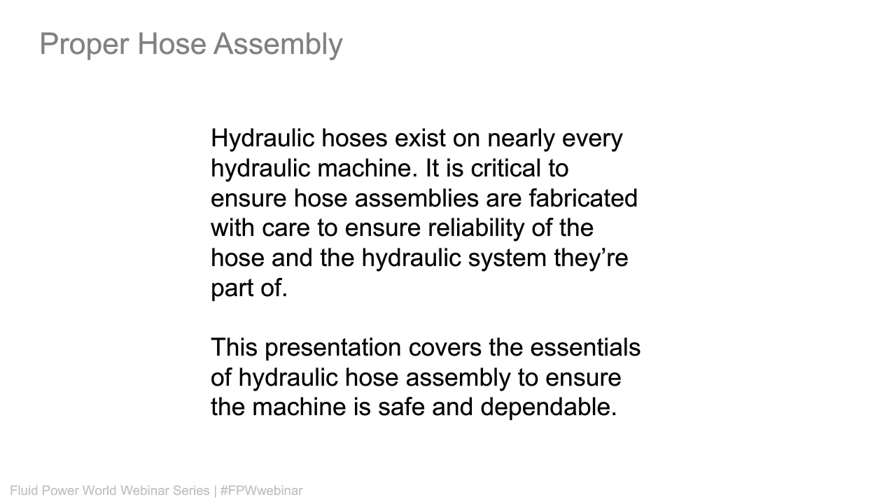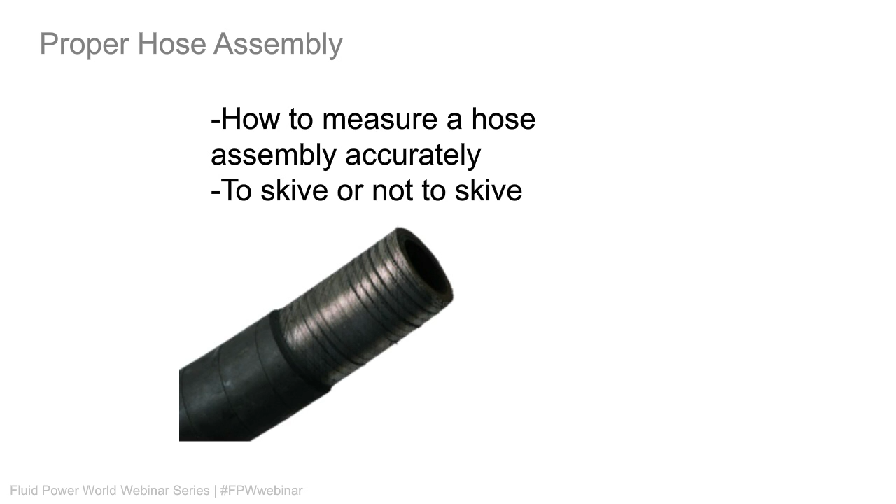So what we're going to cover today: how to measure a hose assembly accurately, to skive or not to skive - that is the question, what hose to choose for the application, and why hose flexibility matters.

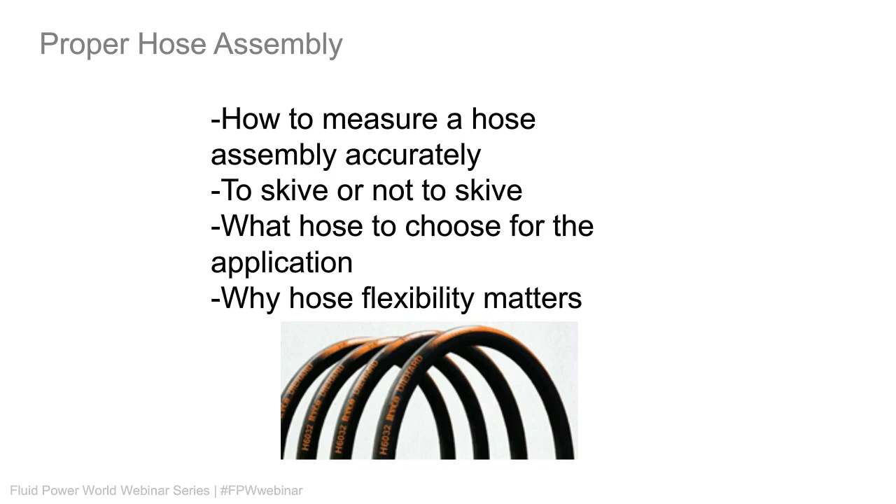So you have to consider an important first step: identify what you need. Sounds simple, you want a hose, but there's more to it than that. Is it a new hose assembly, or is it a replacement hose assembly? As you can see, this one's pretty old, needs to be replaced.

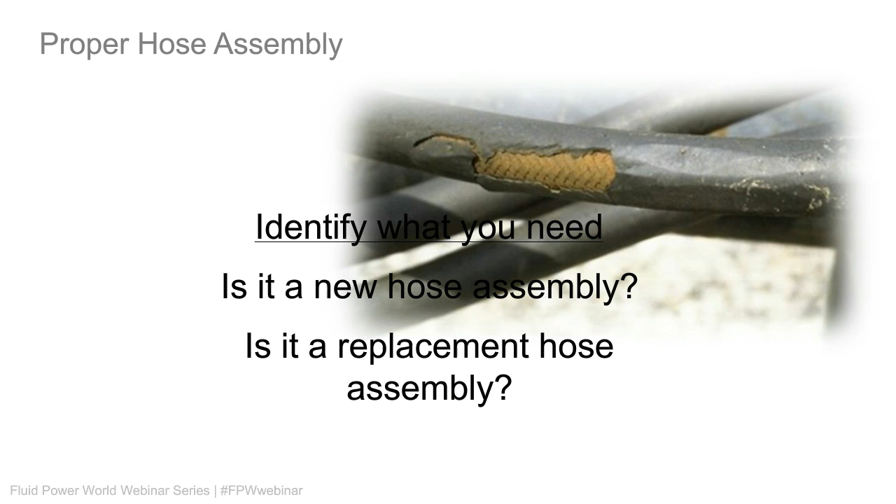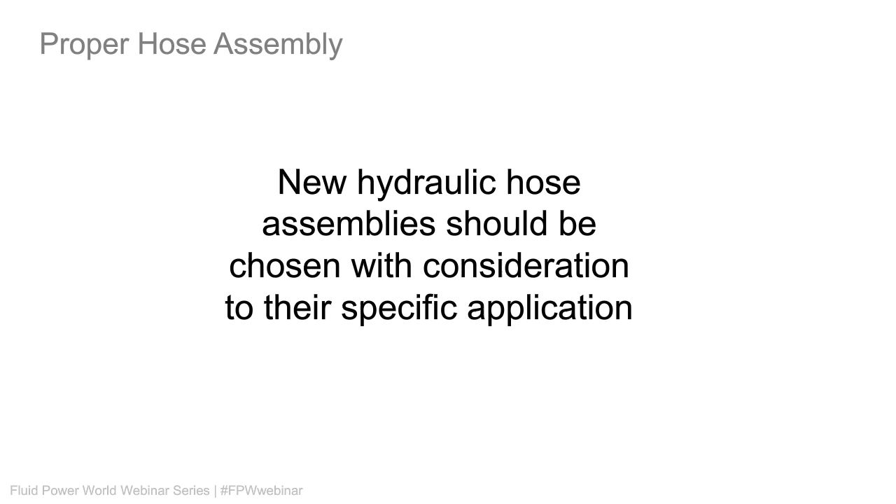New hydraulic hose assemblies should be chosen with consideration to their specific application. If you're creating a new hose from scratch, you need to lay it all out to decide what kind of hose you need. You may have seen this trusty acronym stamped - every letter stands for something: size, temperature, application, material, pressure, ends, and delivery - delivery being how much you need and when. I'm going to go through this acronym, the STAMPED, and discuss every stage of hose selection up towards assembly.

So first consideration is size.

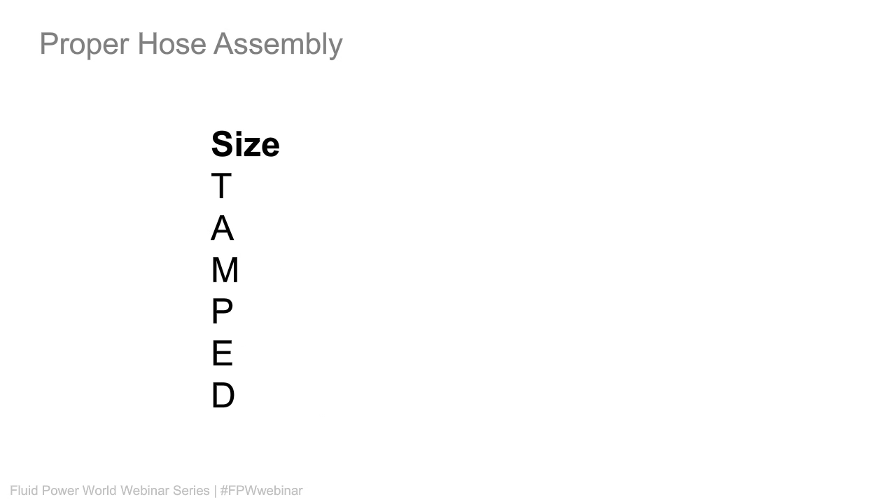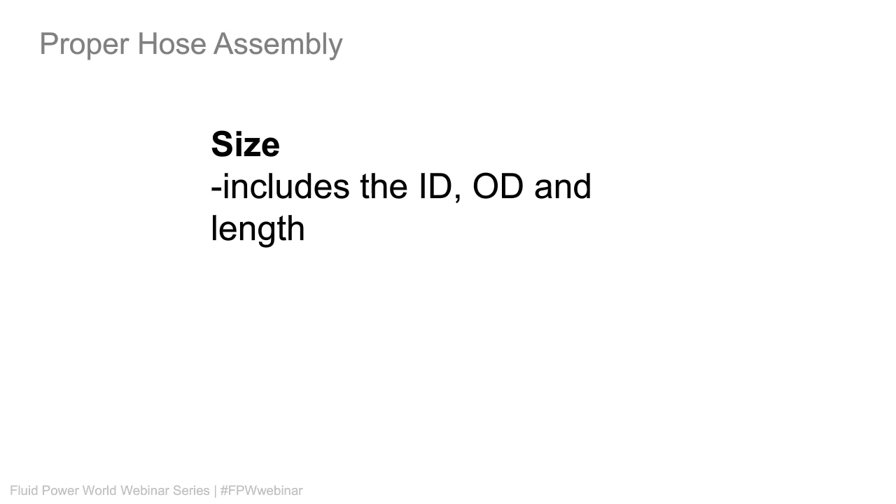So the size includes the ID, the OD, and the length. So ID of the hose is critical, because the hose must be sized appropriately to handle the flow with a little pressure drop.

So if you have a system with 12 gallons a minute of flow, something around the half-inch hose is probably pretty good. If you're at 30, 40 gallons a minute, half-inch is no longer acceptable. There's too much pressure drop.

I've seen applications of 500 feet of hose on an underwater robot that was run by hydraulics, and it had 1.5 gallons a minute of flow, and even using quarter-inch hose caused 1,500 psi of pressure drop. So that just shows you how critical hose diameter can be.

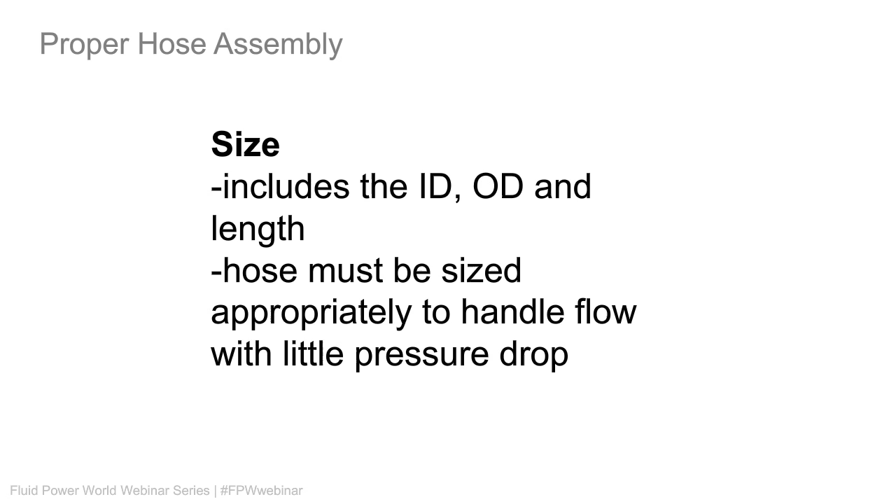So measuring the length. A lot of people will take an old hose assembly they pull off a machine, or just a new assembly they've had somewhere and they're trying to copy it, and they'll measure the entire tip-to-tip length. That's not really the right way to do it. If you try to copy that, you'll end up having hose lengths that may not fit the machine they came off of.

Using this example, the overall hose assembly length is actually where the fittings join. On the left side, you have this JIC female. It mates up to where the male side of the JIC is inside the fitting itself, not at the tip of the threads. On the right side, on that 45-degree elbow, you can see that the hose links onto the center point of that fitting, not to the very tip. So it's critical to measure a hose so that it's at its mating point rather than at its entire tip-to-tip length.

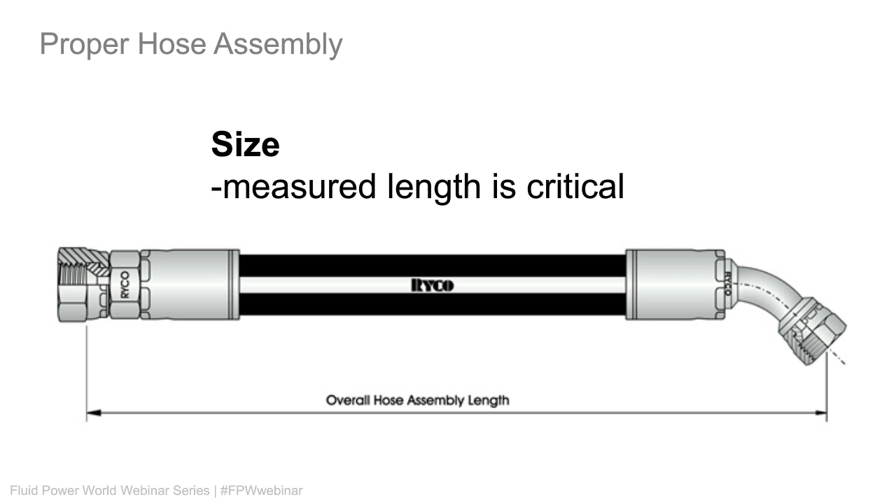So one thing to factor when you're going to size up your hose: it's good to get the whole end-to-end length of the measuring of the hose, just like the example we had. But that's not what you want to cut your hose to. If you cut your hose to that entire measured length, your hose is going to be too long. I'd rather have a hose that is too long than too short, but it can cause bunching and vibration, and it just might not fit and look pleasant in the end.

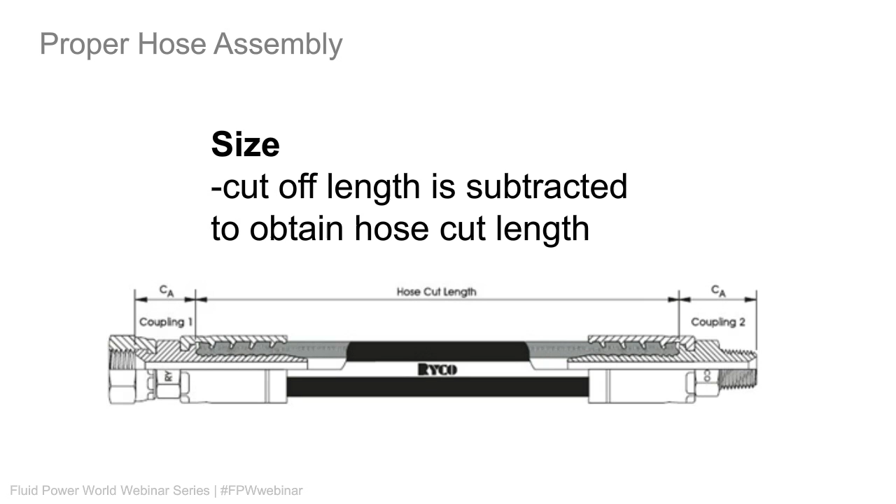So one thing you have to factor is how far the hose goes into the fittings. What we have here on a hose is what we call the cutoff factor. Each end of the fittings has a factor for how far the hose is pushed into the fitting itself, so you have to subtract that from the total hose length.

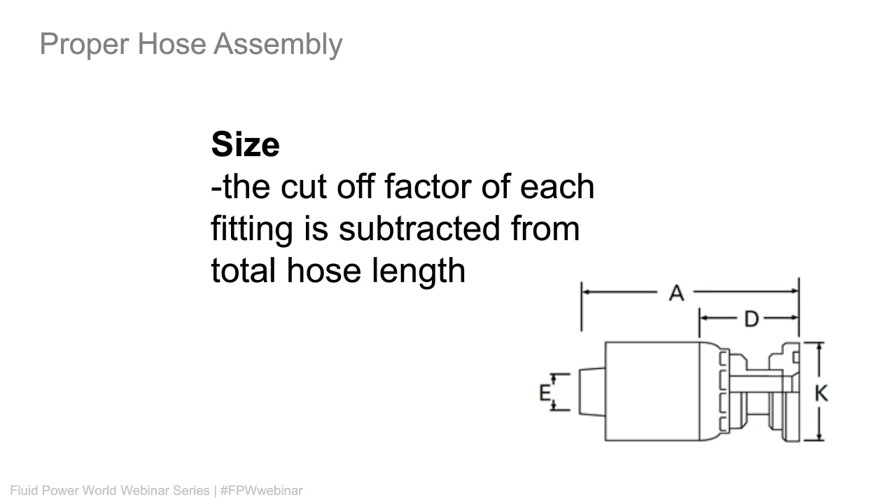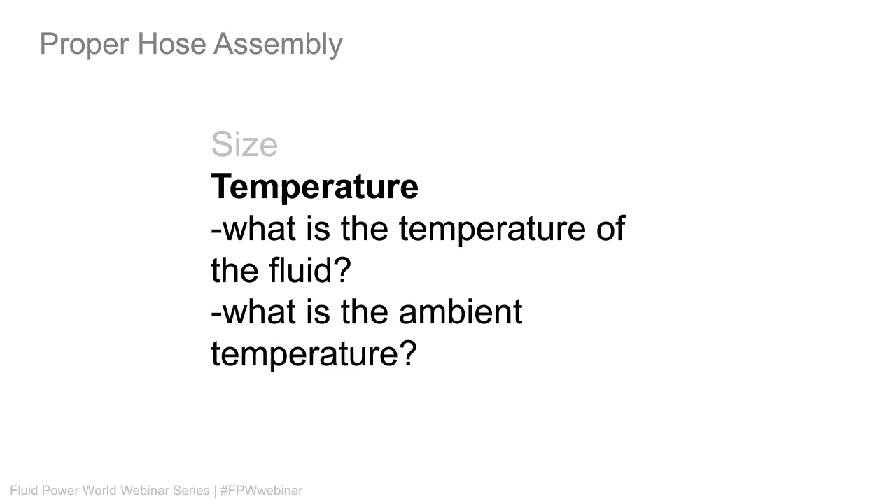Now why this is an important consideration for ambient temperatures: no hydraulic oil likes to be up to 212. At that point, you're cooking it, you're boiling any dissolved water that's saturated within the fluid. You're oxidizing it very quickly. The fluid would varnish very quickly. So it's just a terrible condition to have hydraulic fluid that is that hot.

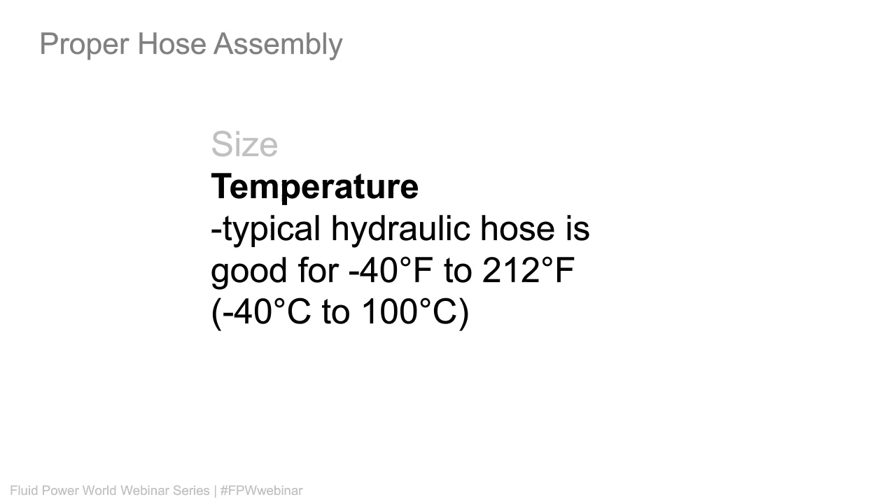However, you need to be able to handle ambient temperatures. So in machinery, mobile machinery specifically, you could have hoses running right past an engine or near exhaust components underneath the chassis of a truck. Examples in a steel mill as well.

So you might have high temperature hose that is good for 300 plus Fahrenheit. I should specify that's also at ambient temperatures. Even if you have high water-based fluids that are fire resistant, you still have to have hose that is going to resist melting or fracturing or softening and having the whole hose ends come apart. But I should mention that when it comes to handling those kinds of temperatures, a high temperature hose up to 300 is for ambient temperatures, not for the fluid itself.

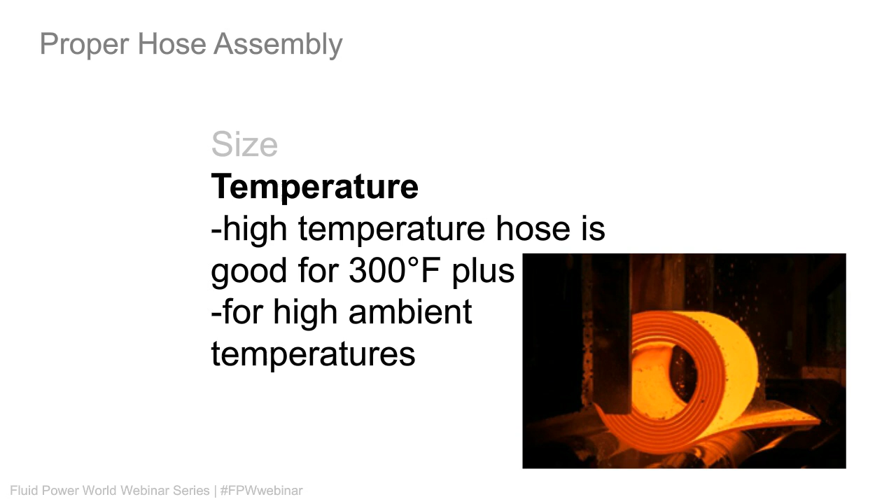And conversely, you can have a low temperature hose. This can be good to minus 58 Fahrenheit or lower, and this is for cold ambient conditions. So here we have an excavator running in some Arctic temperatures. The machines are so reliable these days, they can run all year round. You used to have construction season from May to September, and now construction season lasts all year long. That's because of the nature of hydraulic machinery and how much more reliable they are.

What happens is when you have a cold hose, it becomes more brittle, so it'll crack and fracture, but it could also just have a poor bend radius or just poor reliability. So cold temperature hose could be appropriate.

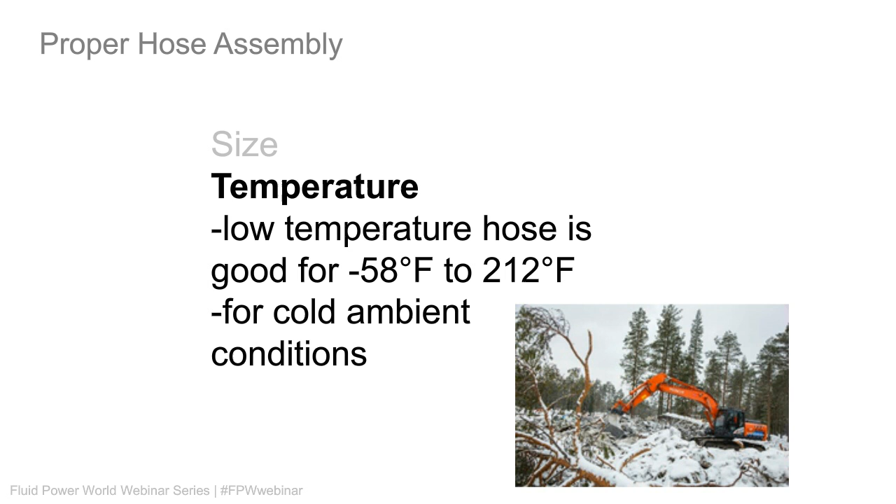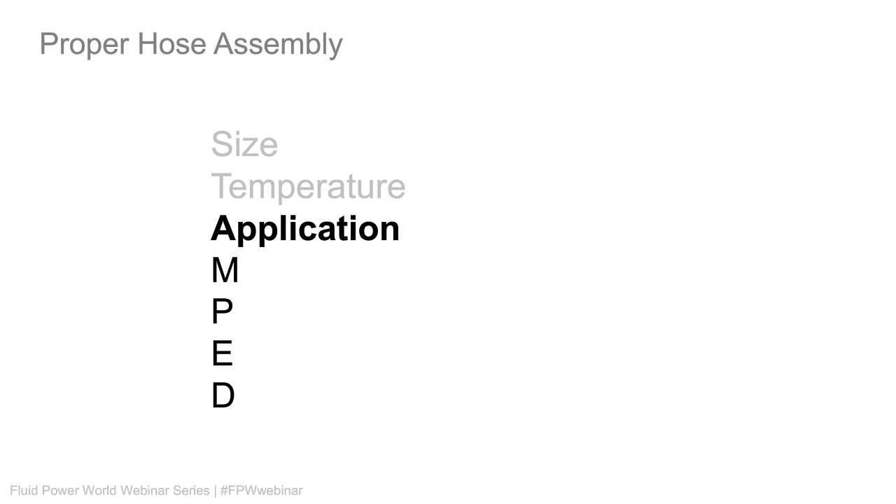So then discussing further, we have your application. This is specific to what this is, regardless of all the other factors. Where is the hose being used, and then what is the required bend radius? So these are application details.

When discussing a bend radius, here we have this picture. I'm actually showing bend diameter, but bend radius would be half that dimension. So this is an example where you have two components that need to be closely mounted to each other.

The ideal situation is these would be hard plumbed with tubing, but there are some cases where you have to use hose for vibration resistance, or perhaps the two components move away from each other, so they could be on a boom, or a cable track, or something like that on an injection molding machine platen. So tight bend radius hose can be used, which is often twice the flexibility of standard hydraulic hoses.

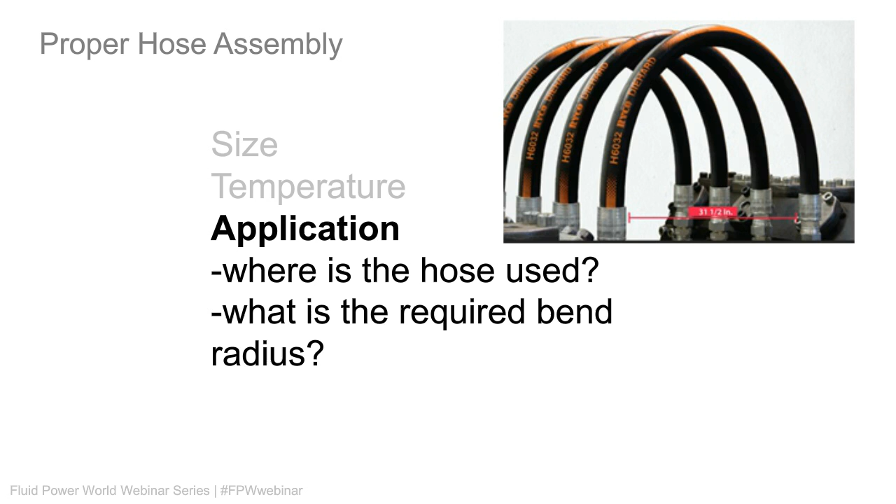Okay, so more details about the application. What are the external conditions? Not just about cold weather, but is there risk of abrasion or corrosion or electrical conductivity?

Abrasion-resistant hoses exist, so the outer cover is reinforced so that it can rub against things without wearing away. So it has a tougher cover.

You might have corrosion-resistant braiding. So, for example, a lot of hose will have braided or spiral steel. You may have a synthetic fiber, such as Kevlar, as that braid, which obviously will not rust, because any water that gets onto a hose, the cover is permeable. Water can seep through, and if you go back to that image I showed earlier with the used hose, that braiding can rust, and as it rusts, it loses strength, and you can have hose breaks and bursts.

So having corrosion-resistant braiding material could be important. If you work around power lines, like you see in this picture, you want to have electrical conductivity avoided at all costs. You can imagine the hydraulic hose will touch one of these power lines and then conduct electricity right through the machine into the ground or to the operators. So they use a non-conductive hose, of a synthetic material, that can still handle pressure without actually conducting electricity.

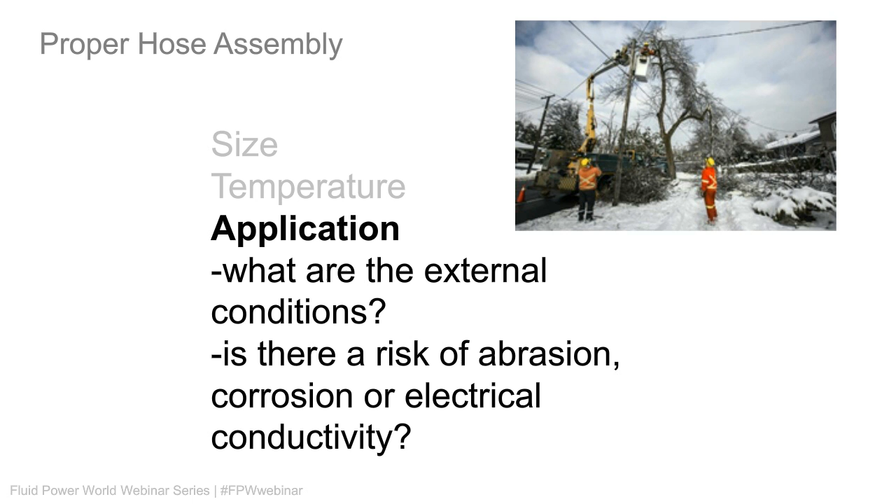So the next step is selecting your material. What type of fluid is being used? This is critical to hose selection.

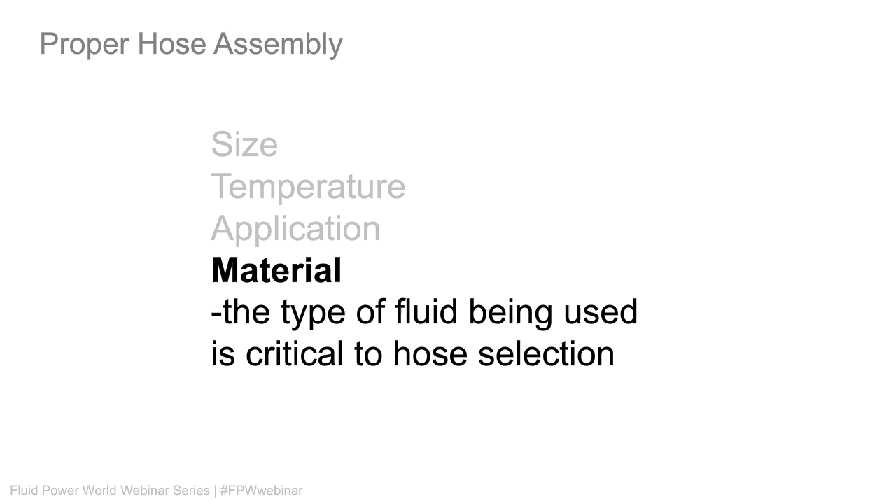The standard mineral-based hydraulic fluid is compatible with most hose types. Most hose types might have a nitrile buna tube on the inside, the inner portion of the hose. And most standard hydraulic oil, the AW68 or what have you, the industrial oils, and most of the machine oils we use, transmission oils, ATF, that stuff's usually good with most of your standard hydraulic hose constructions.

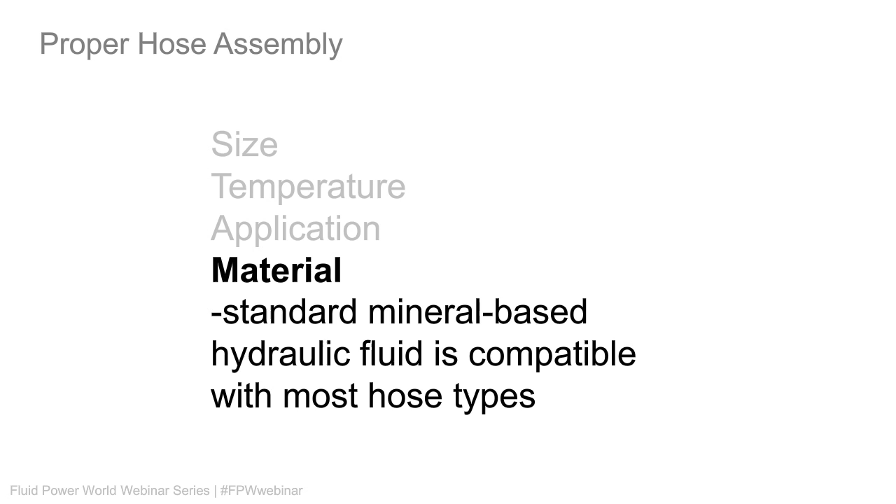But you could have some exotic fluids like phosphate ester, which require synthetic hoses made of EPDM. It's a little bit of a more nasty or corrosive fluid that requires a more—I wouldn't say stronger—but something that is better for compatibility, something that will not break down or crack or become brittle because of the nature of the fluid.

And there are cases too where you have high water-based fluids that may affect your selection of hydraulic hose as well. High water-based fluids might have an emulsion or some other glycol or something like that, but still the content of water can make them react with the steel braiding and have it rust over time as well.

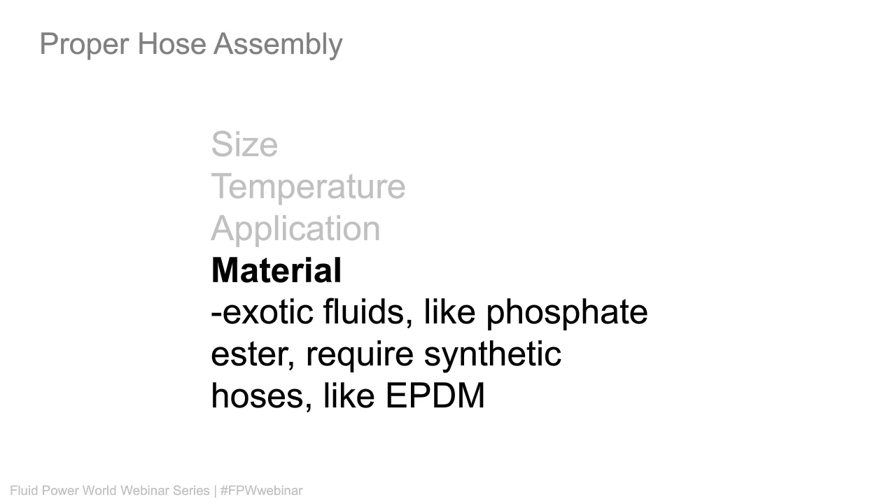And then pressure. Of course, pressure is what hydraulics is all about. So pressure capacity is the defining criteria for a hydraulic hose. It's why it exists, and it's why hydraulics is the magical principle that it is. And the pressure capacity that you need dictates hose construction.

So there are a lot of ways to skin a cat, and there's also a lot of ways to make hydraulic hose. So the pressure that you need, combined with all the other factors I've spoken about so far, will affect the construction of that hose.

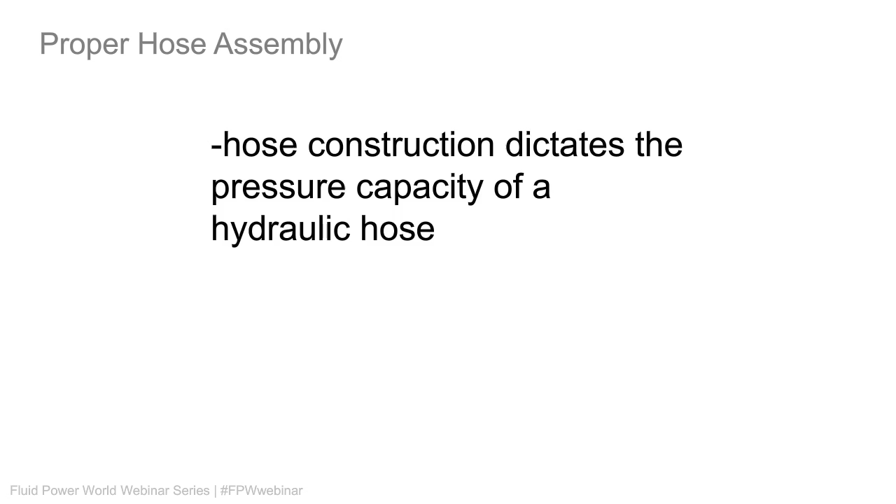Hose construction dictates the pressure capacity of the hose. Depending on how it's constructed will depend on how you can rate your hose for pressure. So the three layers of a standard hydraulic hose, this is what we call a one-wire hose. You have the cover, the reinforcement, and the tube. The cover is on the outside.

The reinforcement, in this case, is braided wire. Now when we say one-wire hose, there's not literally one wire that's been wound around a million times, it just means one layer of wire. So in this case you have one wire, one layer of braided hose. By braided, it means this crisscross fashion of strings of steel braiding. It's pretty tough but also pretty flexible. So the one-wire hose is typically the lighter duty of the selections, but also very flexible. The type of cover, reinforcement, and tube are also factors in your abrasion resistance, your conductivity, and the tube can affect the chemical compatibility of your hose.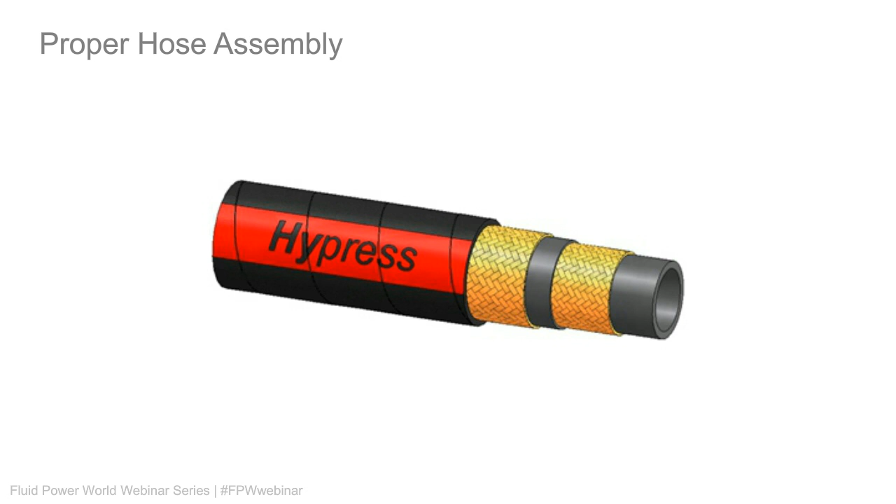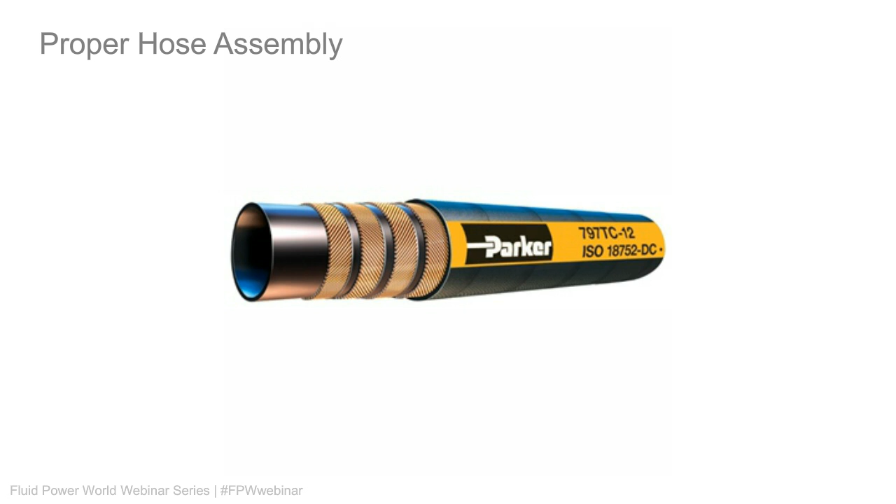Stepping up a notch, here we have a 4-wire design, and you can see that the braiding is not braiding at all, but spiral. Every direction of wire is crisscrossed so that the spirals go in an opposite helical direction. This adds even more strength. Just having the number of wire layers adds strength, but the downside of this type of hosing is you start to have reduced flexibility.

So as these hoses become bigger, as the pressure capacity increases, so does the stiffness. There's an inverse proportionality between the size of the hose and the pressure capacity. Good quality hose can generally handle pressure from any size, from 1/4 inch up to 2 inch or larger. But some of the standard braided hoses, the smaller it is, the higher the pressure it has. For example, a 1-wire 1/4 inch hose could probably handle 5,000 psi, and that's just because of the nature of pressure and the amount of force vectors it has to push on the inside of that hose.

So without getting into physics or math, the smaller it is, the more inherently strong it is, so it can handle pressure all by itself. The larger you go, the more surface area there is for pressure to push upon, and more opportunity for the forces to want to make it burst outward. It's the same reason that a large hydraulic cylinder makes more force than a small hydraulic cylinder.

So kicking it up a notch once again, here we have 6-wire spiral hose. You can imagine that the pressure capacity increased even further. This one actually has a couple layers of cover on it. It could be for chemical compatibility, heat, or abrasion resistance. But this is some pretty heavy-duty hose right here.

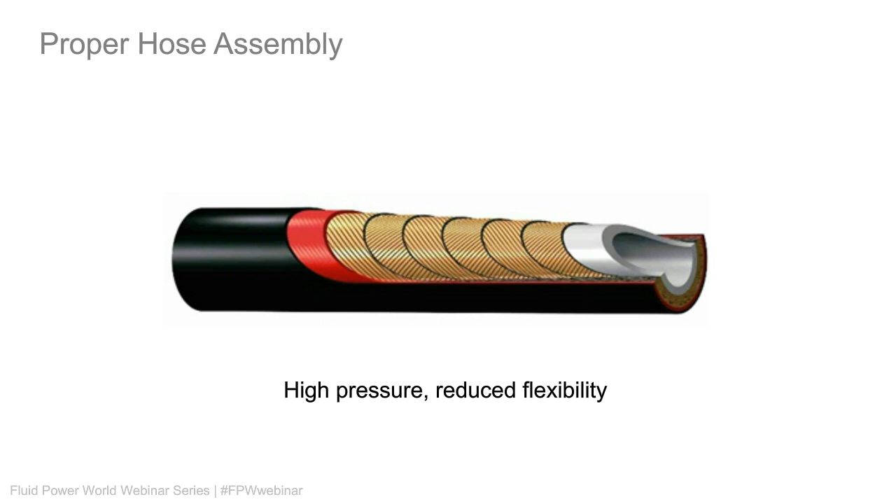So if you flip through the catalogs of any given hose supplier, in this case we're looking at some Ryco H6000, their Die-Hard series hose, it's going to give you all of the parameters and specifications of that particular hose. It's going to start with your hose number, the dash size. Here's a little trick: if you've never heard the dash size before, just look at this chart. You can see the dash size 06 equals 3/8, and 08 equals 1/2.

The 12 equals 3/4. There's a pattern there, and somebody thought it'd be clever to make that dash number over 16. So for example, dash 6 is 6/16, which is also 3/8. Really the dash size just expresses the fractional inch size, if you didn't already know that. So the dash size, which is also the nominal ID of the hose, is nominal because it's not always exactly that diameter, and then there's the nominal OD of the hose.

In this case, you also get your maximum working pressure. This is the pressure that a hose can work day in and day out. So this particular Die-Hard hose will work at 6,100 psi all day long till the cows come home, and every size they offer in this line will operate at that pressure. That's just because of the nature of its construction.

The burst pressure is what they offer as the maximum pressure before this hose will generally explode or have a rupture in it. The entire thing is not going to be catastrophic like an exploding propane tank, but the nature of hydraulics and the bulk modulus of oil means you'll have a tiny pinhole and a squirt, and something will give way and allow pressure to bleed out or drop quickly.

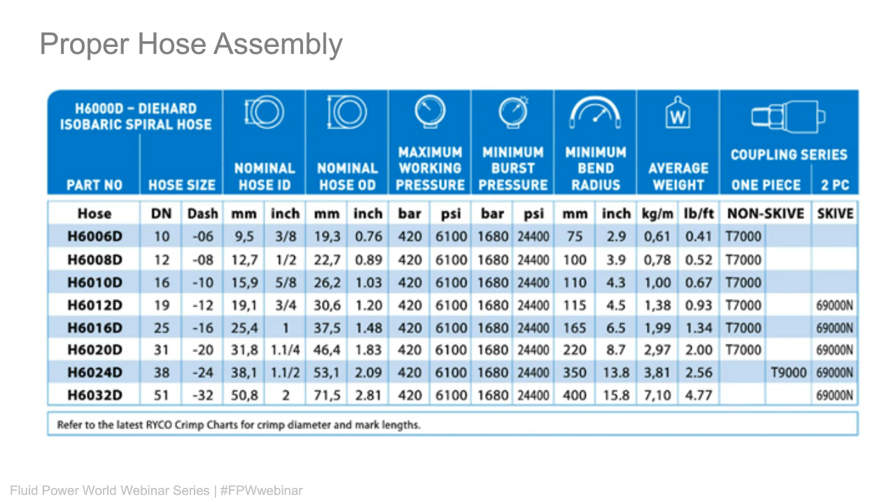So just as a quick comparison, this is the Ryco T1A, which I think has been discontinued, but regardless, you can see the different sizes, and you can see that they are different. If you look at the OD of the hoses, we'll compare one in a second.

Generally, because it's a low pressure hose, it's a smaller OD, so it's going to have reduced working pressure. Right across the board, you can see my point earlier where this 3/16 hose has a 3,600 psi rating. As you go larger in diameter, nothing changes about the construction, but just because of the nature of larger diameter and the forces applied to it, you have a reduced maximum working pressure. And once again, you have your minimum burst pressure, which is 4 times the working pressure.

There's an advantage to this, of course, when you have a lower pressure rated hose. This is why when choosing hoses, it's good to know exactly what pressure you want to run at. If you have a system running at 1,500 psi, do you really need to choose a 3,600 psi or 6,000 psi hose? Not really. You can save cost, save weight, and have improved bend radius by going to something lighter duty.

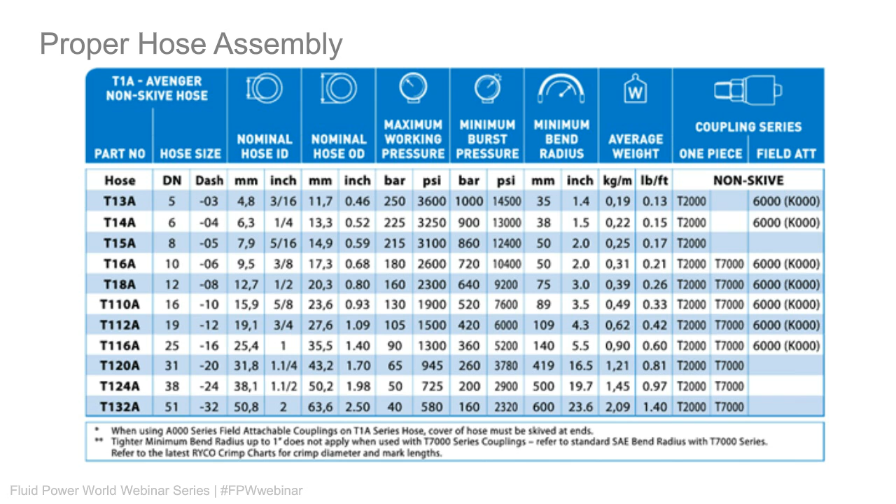So these ones will have a tighter bend radius, and they will also weigh quite a bit less per foot. So here I took the two and compared them in the Dash 16, which if you take 16 over 16, you get exactly 1 inch. Goes back to that whole dash sizing thing. And then we're going to compare every single factor along the way here.

So if you want to compare heavy duty and light duty, on this size you can see that the nominal hose OD is larger on the H6000D series. That's because it has anywhere from 4, 6, or 8 spiral wires, depending on the size of the hose. So the larger diameter hoses in that hose series will have 4, 6, or 8 - probably 6 or 8, depending on the size.

Anyway, the larger it goes, the more spiral-bound wires there will be, and you need a thicker hose in that case. In this case it's not very much, it's 80 thou, but it still accounts for a larger fitting or crimp that you have to put on it eventually. But look at the dramatic difference in maximum working pressure - just 1,300 psi working pressure for the 1-inch T1A compared to the H6000.

And then, of course, burst pressure being 4 times that. But here's where you have a trade-off. Looking at the bend radius, you can see that you can go on the T1A an inch tighter in the radius, which means 2 inches better on a whole circumference, or diameter, I mean. And then once again, in weight, this is where it really gets dramatic.

So if you have a mobile piece of machinery that is not an excavator running 4,000 psi plus, you can see where the weight savings come in. And this is per foot. I've seen some trailers and other pieces of equipment that literally have hoses running the length of a 50-foot trailer. And if you add up all that weight of hose, you can imagine twice the weight of a 4-wire hose, or this one could be 6-wire in this case. So that really adds up.

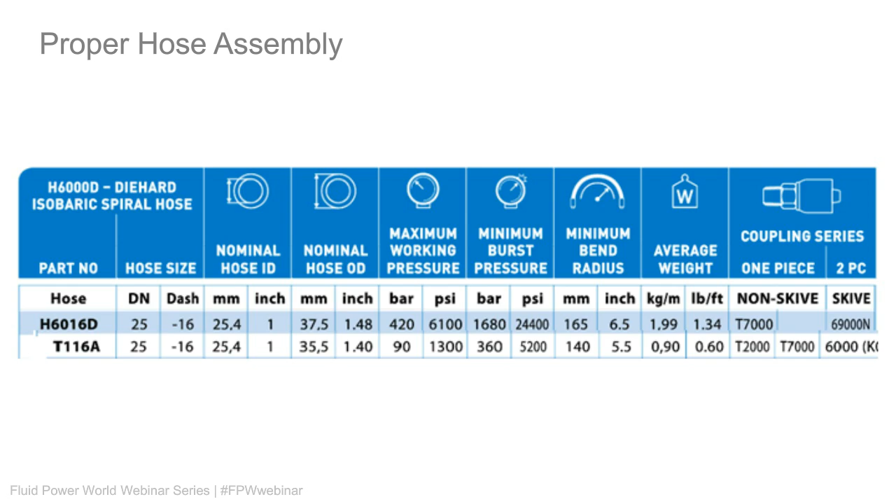So back to our stamped acronym. So now we're going to talk about the ends of a hose.

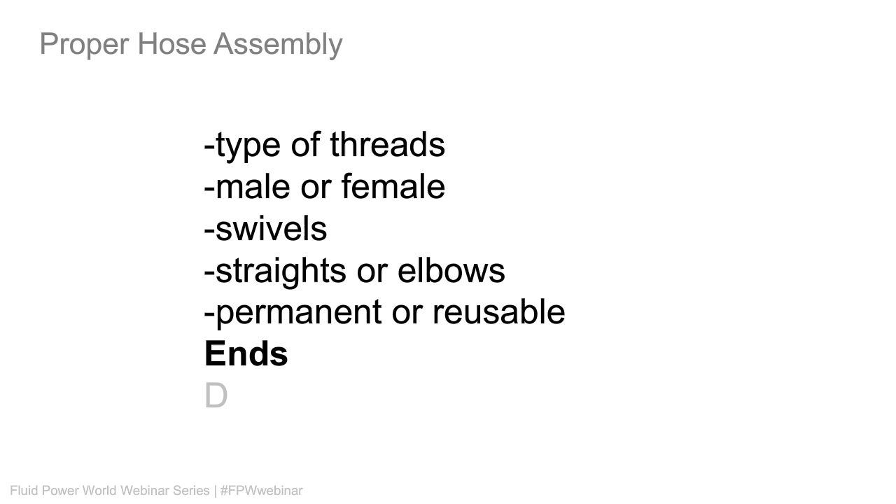So there's lots of ways you can do this. You can talk about the type of threads you want, which can be male or female. You can have swivels. You can have straights or elbows. And then any of those combinations can be permanent, which means crimped on, or they can be reusable, which is also what's called field fittings.

So the choices are endless. Every fitting that you have on a machine that needs to be plugged into, they make a hose fitting for it. We have some banjo fittings here. We have some metric, some JIC, some O-ring face seal. We have some NPT fuel fittings there that are swivel on. You name it, we got it.

So reusable fittings, which are also called field attachable, that's your first choice. I've spent a lot of time working with these in my day. Back in my car wash days, that was really all we used. We didn't have a crimp machine there. We had a vise and a wrench, and we could do these things in the field.

Crimped-on fittings are permanent, so also done a lot of this in my day. This requires specific machinery, which we'll talk about shortly.

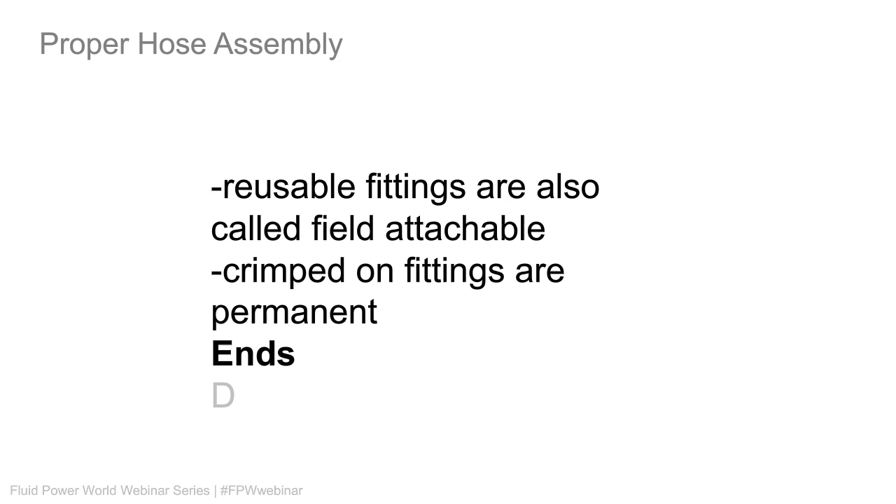So you may have seen these reusable hose ends. One end will go on the hose itself. The other end gets inserted into the hose. I'll explain a little more on this in a bit.

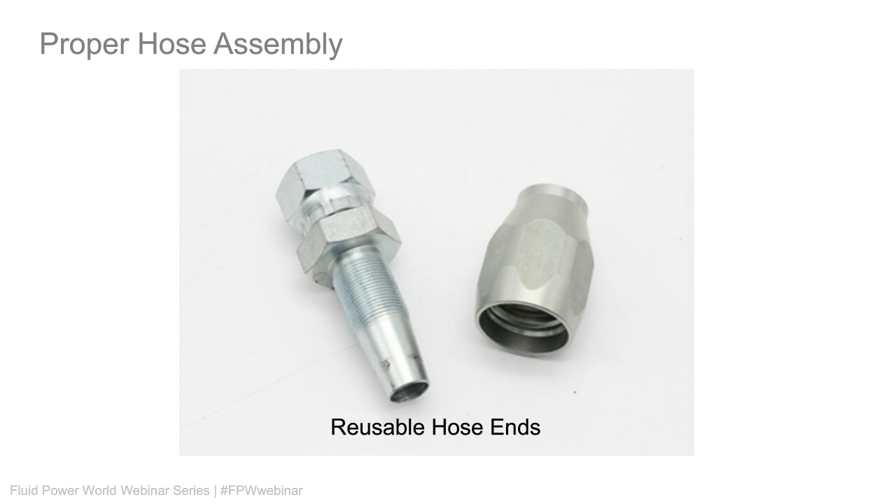And of course, your crimped hose ends. These will slide onto the hose, and your crimping machine will crimp it down permanently onto the hose. Once again, available in various sizes.

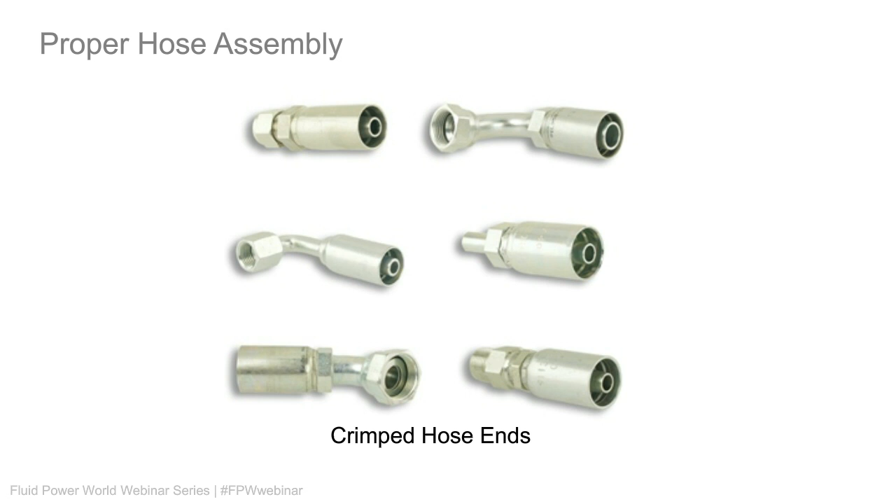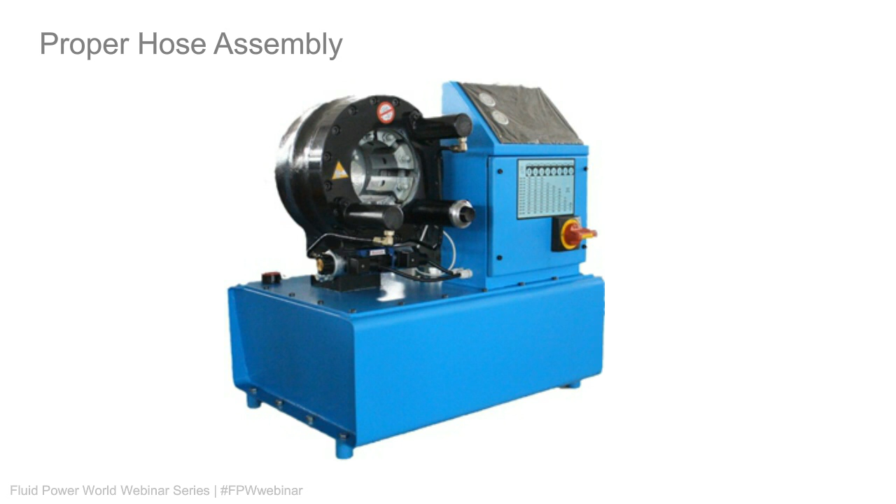But any average hose shop will have something more like this. This is a little bit fancy. It's got a hydraulic valve on here, and it's all hydraulically powered. Plugs into the wall, and it's electrical. This guy is accurate. It's got the full complement of dies in it, and you can see there's even a chart on the front of it to help you with your micrometer and all your settings to make it quick and easy.

If you're a very high volume shop, you have something like this, a CNC crimper. As you can see, this is absolutely ginormous and in the size of hose that you can crimp. I wouldn't want to be this guy because that hose probably weighs 100 pounds.

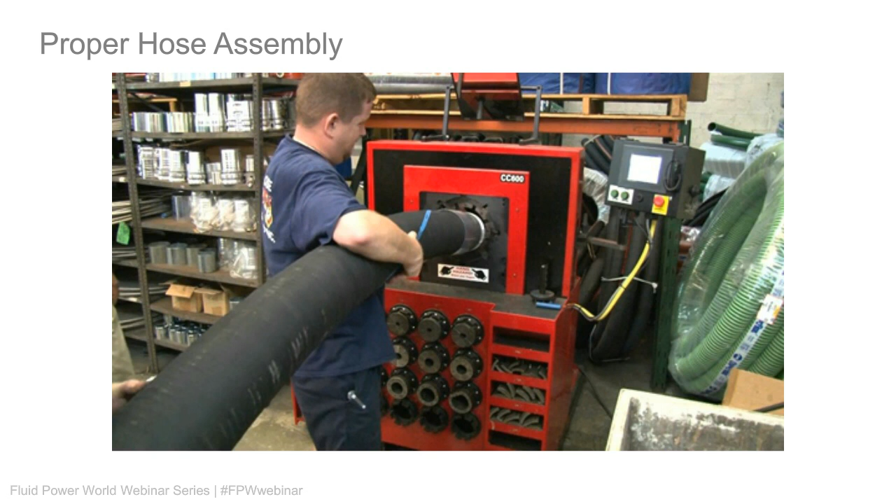So like I said, once you have your crimper—this is more in line with what most of you have used, will be using, or will see in our shop—you'll take this machine and then look into the data given to you by your hose and fitting manufacturer.

Here's what you might see in the front of a catalog. This is some more Ryco components, and it'll show you the types of hoses that are color-coded with the type of fittings you can use for that particular hose.

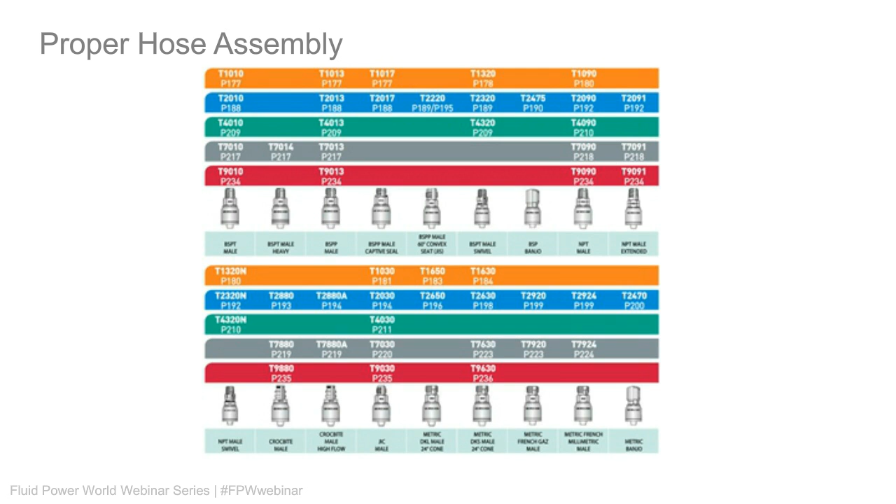Flip into the general catalogs and you'll see they give you that cutoff factor, the CA. Every fitting has a different cutoff factor, so when you're measuring your hose end to end, you subtract the cutoff factor, and those two cutoff factors subtracted from your whole hose length give you the length you cut your hose at.

You can see that it's listed here, for example. I think that's in metric, so 25 would be about an inch.

Once again, you can see those dash sizes used: 02 is 1/8, 04 is 1/4, 06 is 3/8, etc.

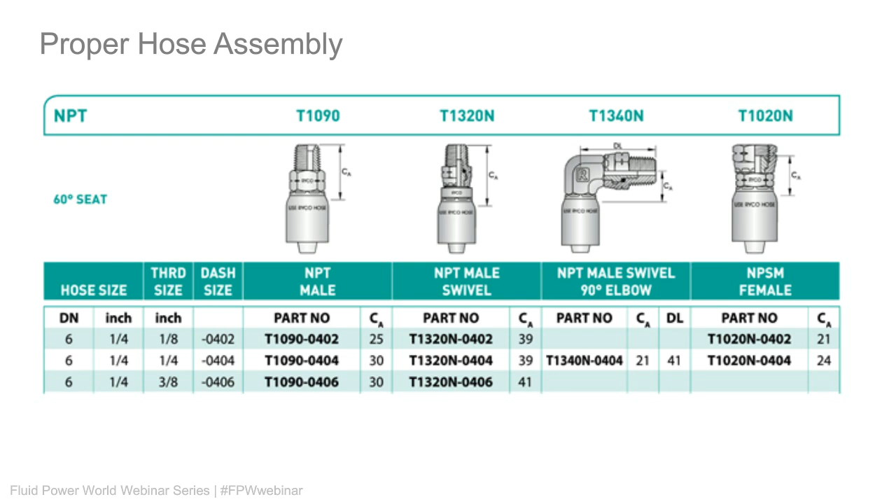So the idea is you set that up, set your dies, set that number, cut your hose, put the fitting on, crimp it.

And how do you get that? You get it with a set of calipers. You can get these at any tool store or any of your machine suppliers. That'll give you down to thousandths of an inch—in this case, this one gives half a thou.

So you use this to measure your hose to make sure it's right. There's a range you could get within a few thou either side—some ranges could be bigger. It doesn't have to be bang on every time, but it'll let you know if your machine is out of calibration, you inserted the wrong dies, or you set it to the wrong setting. This makes sure every hose is crimped right the first time and that the fittings are not going to pop off on you.

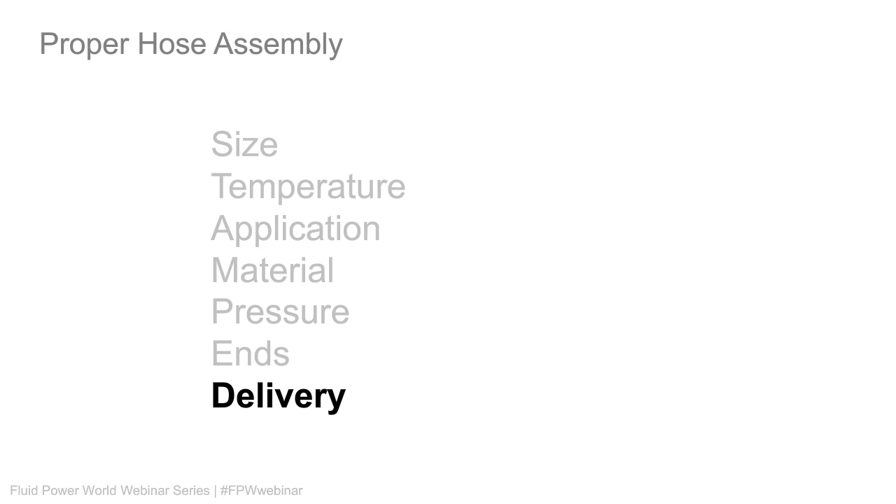Finally, you want to talk about delivery. How many hose assemblies do you need? How soon do you need them? Any special tagging or layline information?

If you're an OEM, you have the advantage that any of the large hose suppliers can provide hose assemblies with a custom layline, with series numbers, or entire hose kits. So if you have a particular machine, say a stone slinger, your entire hose kit could be coming from your hose supplier—every hose needed to plumb up that entire machine will be coded, tagged, and included in the kit so that when you're assembling that machine, it's all there for you. It all goes on the machine the first time, everything accurate and repeatable.

And if you're working with some of the very large hose manufacturers and you're a small guy who wants custom layline information that says 'Bob's Hydraulic Shop,' you can have that made too, as long as you're buying a certain amount or willing to pay for it.

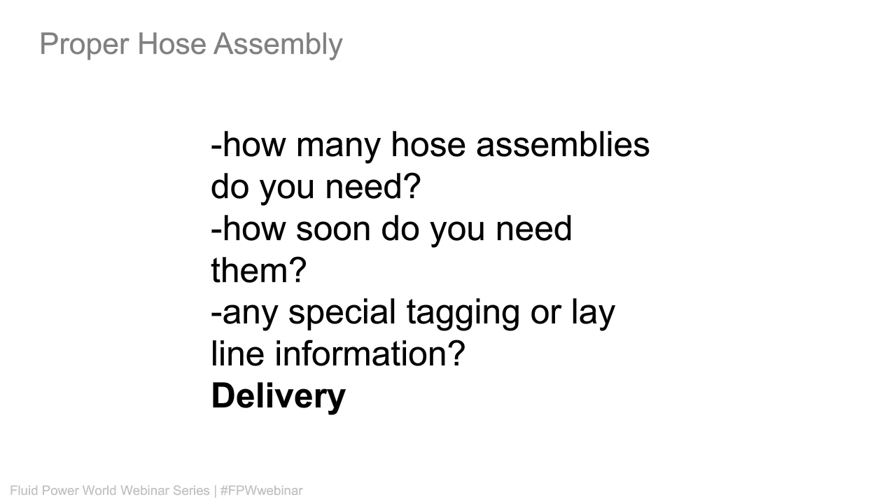So that was all the information for a new hose. But if you're going to work on an old hose—here you can see a burst hose—what do you do if you're replacing an old hose?

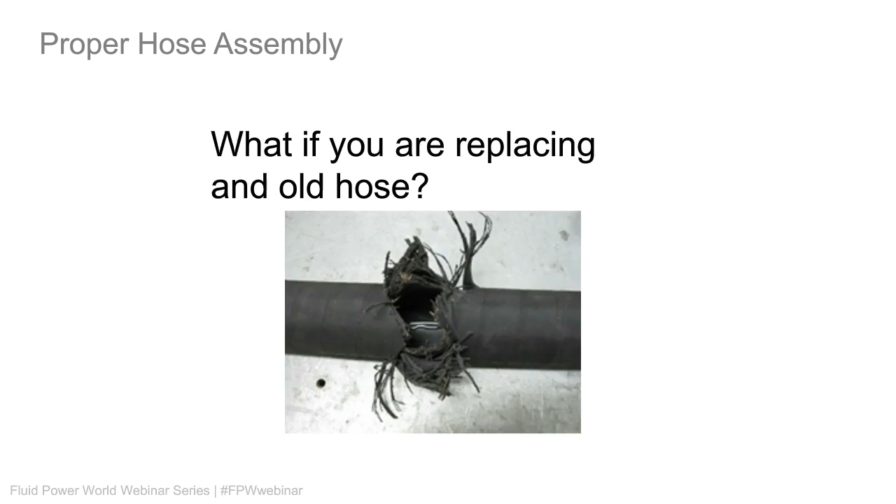Do not try to repair the old hose unless absolutely necessary. The best thing for you to do is follow the STAMPED protocol to ensure that the hose replacement is correct.

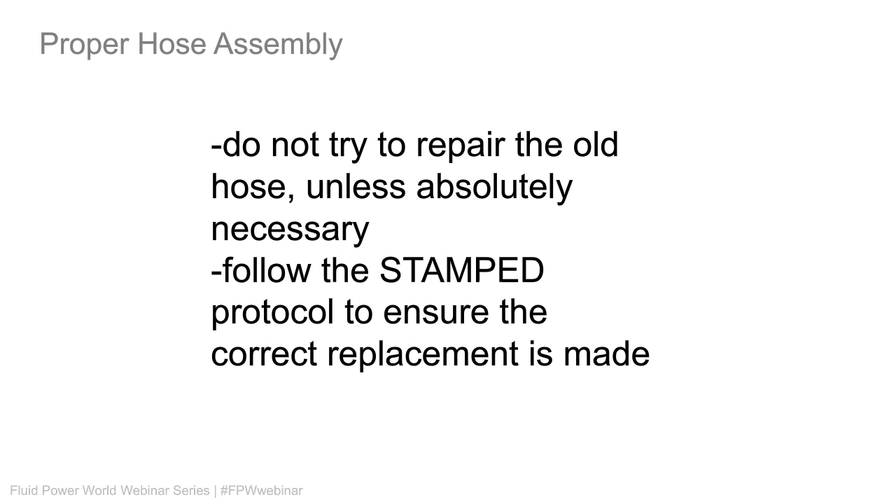However, there are times where it is okay to use an old hose. For any hose, new or old, what's important is you have to use a saw that is specific to cutting hose. They have an all-metal blade. Using an abrasive cutoff wheel can work if you're short, but it tends to not look so good as an end result. So unless you use a specific hose saw with a metal blade...

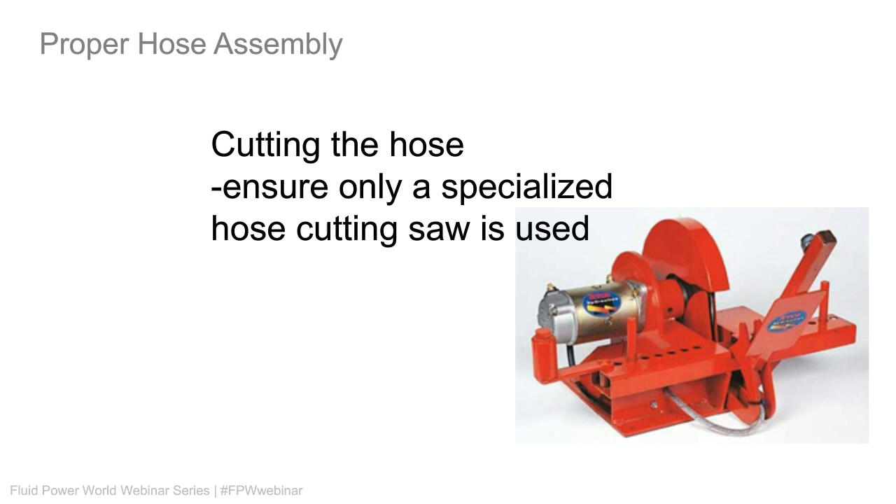One second here, the slide's not coming up. There we go. You can have frayed hoses. Obviously, that's not a hose, but I have seen hoses used with an abrasive wheel look like that in the end if you're using a non-specialized metal blade on that saw.

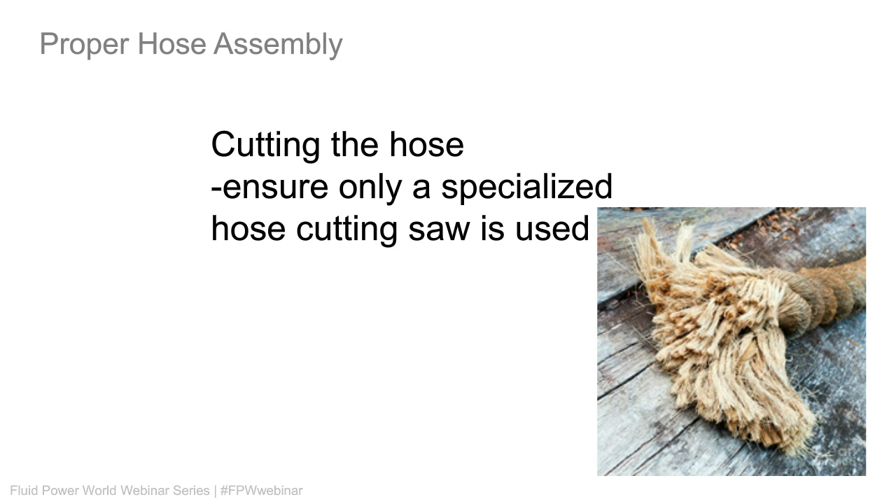Also ensure that you cut exactly 90 degrees. If you cut on an angle, 45 or anything, the hose will not be inserted into the fitting all the way, and you'll not get a proper crimp, and that hose crimp could pop off.

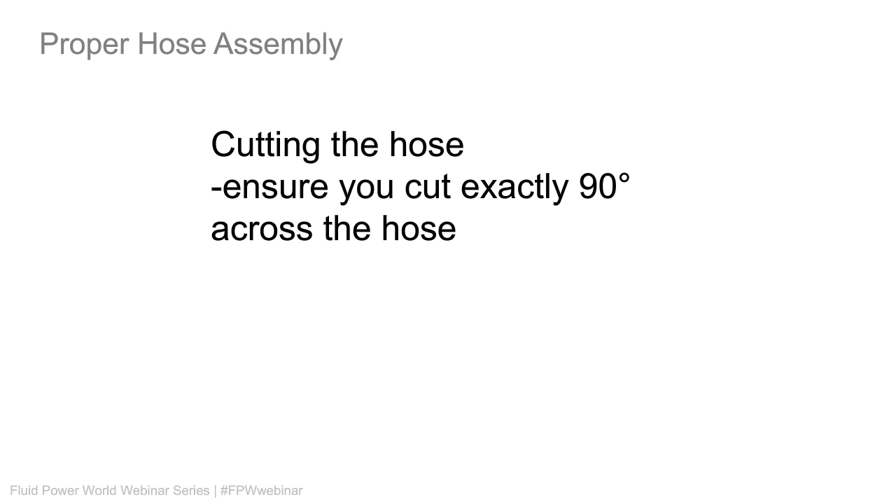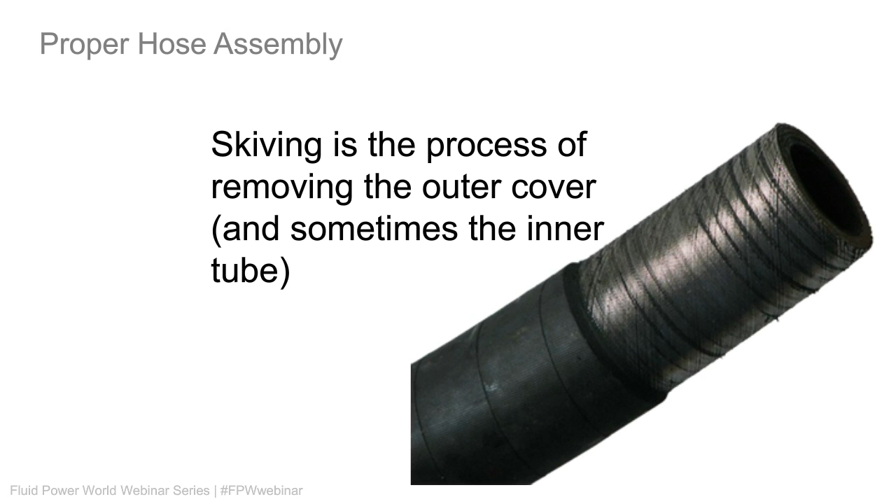So skiving, we talked about this earlier, and we're going to mention it. Skiving is the process of removing the outer cover and sometimes the inner tube. The thing about skiving is you need special equipment. The whole idea with skiving is it allows you to use those reusable fittings. I'll get those in a second.

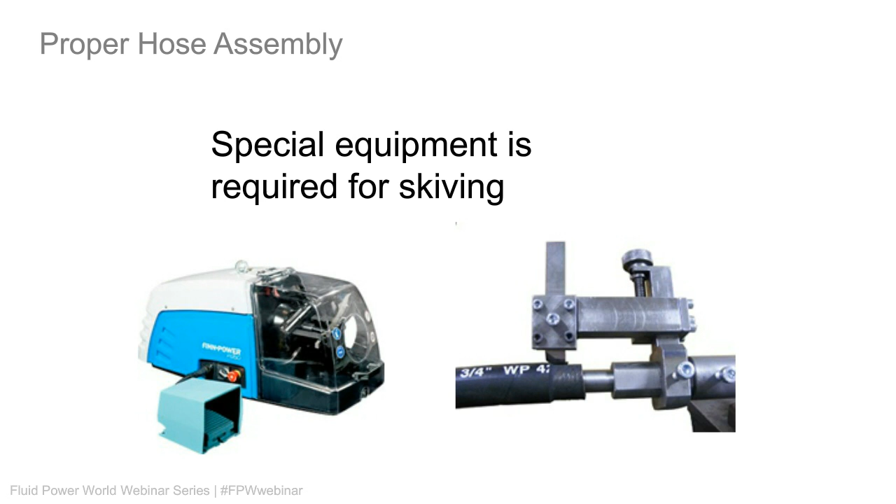Like I said, in the car wash business that I worked at, we used these all the time. When I was a young kid out in a car wash bay, we had a hose break, and the hoses tend to break right at the fitting because that's where there's the most tension, the most bending, the most fraying. You would just cut it off, put one of these on, and reattach your pressure washer gun or what have you.

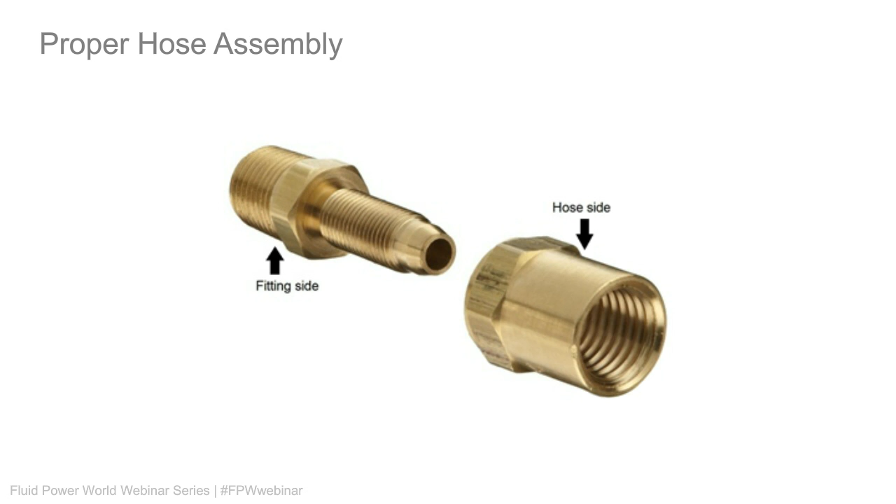Anyway, so regardless of using reusable fittings—actually you can't crimp a reusable fitting—getting back to your completed hose assemblies.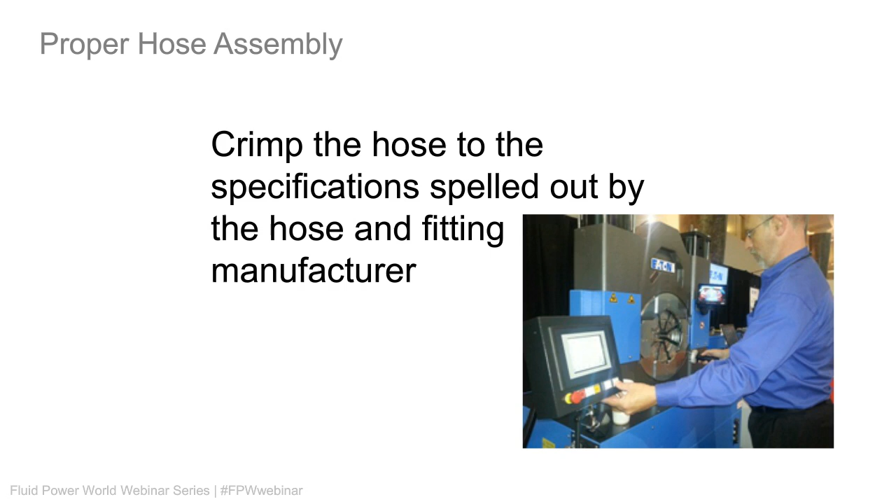Once you have it crimped, you use the specifications spelled out by the hose and fitting manufacturer. You set up your machine and then crimp your hose, making sure you measure it and that it conforms to what the manufacturer spells out in their catalog, that exact crimp diameter.

And then you have a completed hose assembly. These are example hoses—I haven't seen too many hoses that are useful at this length.

So after you have a hose assembly, you need to clean the hoses. If you are a large company with a lot of hydraulic machinery and a lot of highly trained hydraulic individuals, you know how important it is to have clean hydraulic oil.

One of the sources of hydraulic contamination is from ingression. Ingression happens anywhere it's added to the system, through plain dirt dropping into a reservoir, from steel filings, or from anywhere outside the system.

And you don't want to be additive to that if you're doing hydraulic hose assembly. You need to clean the hose so that particles from cutting, skiving, and crimping—the entire process—don't add to the contamination of the system, especially if you're trying to adhere to a particular ISO code of cleanliness.

So you need to use only approved cleaning apparatus, and there are a couple of companies out there that do it. I'm sure you've all seen it in advertisements.

After you clean the hose, you must immediately cap it to protect from environmental contamination. These hoses may go to a shipping area, or to an area on a machine integrator where they build the machine, where there's grinding and welding. You don't want these hoses laying around with the ends open, or everything just falls right into it. So then you'll cap it.

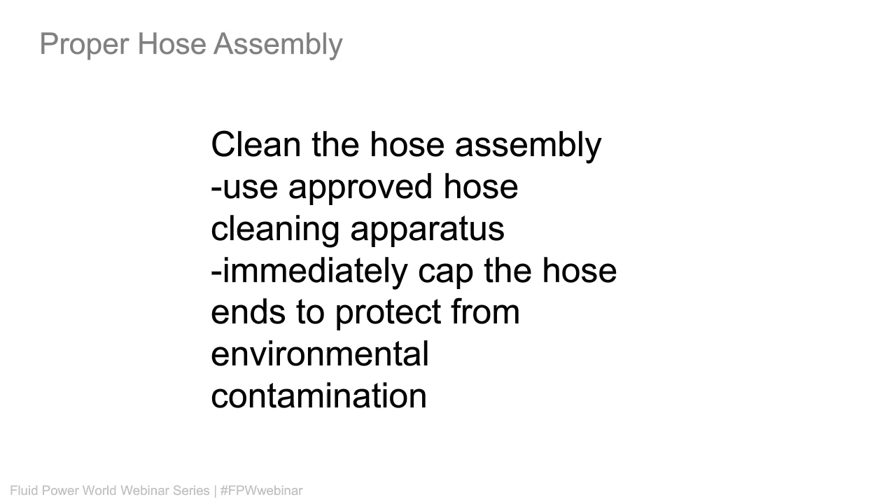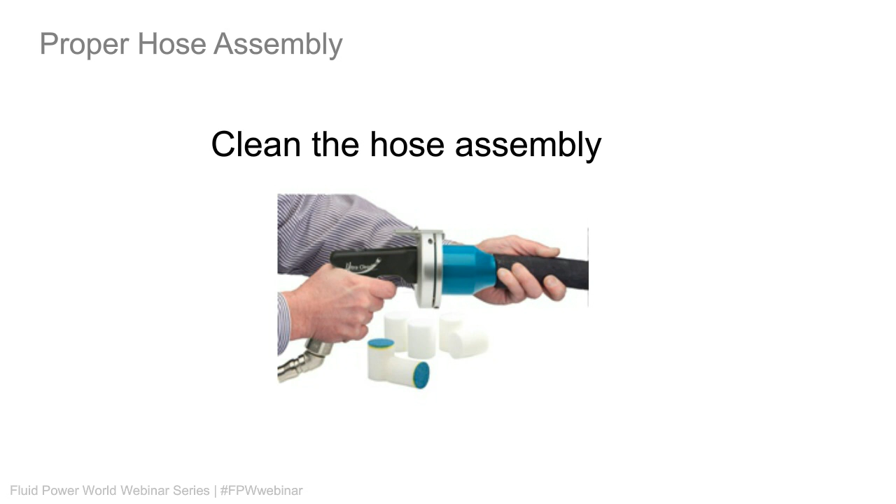So there we are—here's a cleaning apparatus. There are some foam pellets that you insert into the blue portion of this, and it kind of opens and closes. You insert the pellet, and it fires the pellet through the hose, picking up all of the contamination.

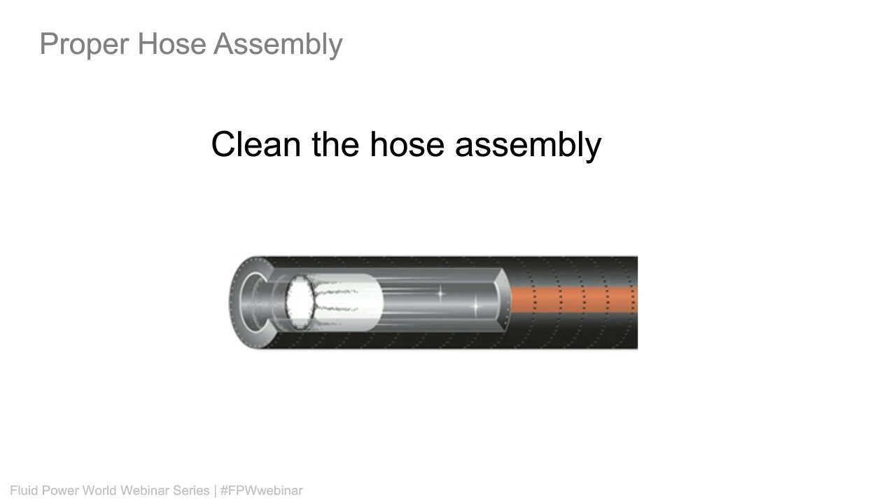The idea is to fire this in both directions. Typically, you fire this after the hose assembly is manufactured—shoot it out the other end, and then cap it.

Having worked in hose assembly shops myself, it was a great blast shooting the foam pellets at your colleagues. It's pretty harmless, but just don't let your boss catch you doing it.

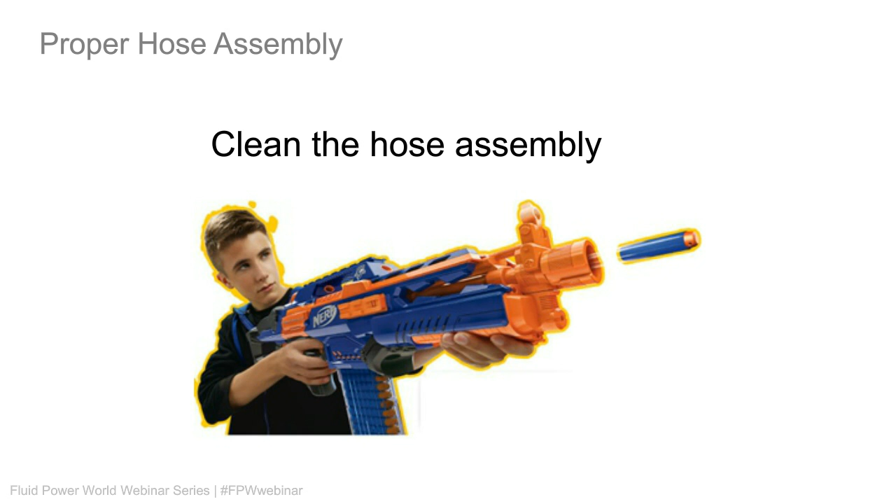Immediately cap the hose, like I said. This protects it from any ingress contamination. And then you have yourself a complete hose.

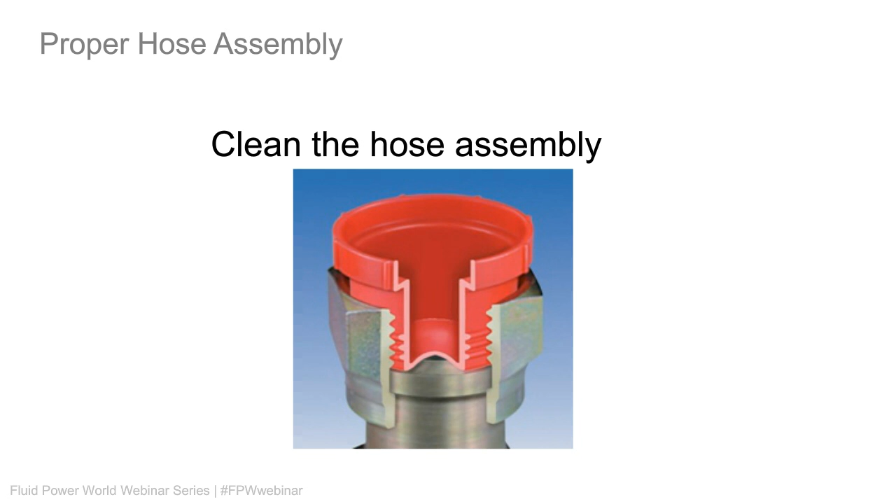And that is the end of my presentation.

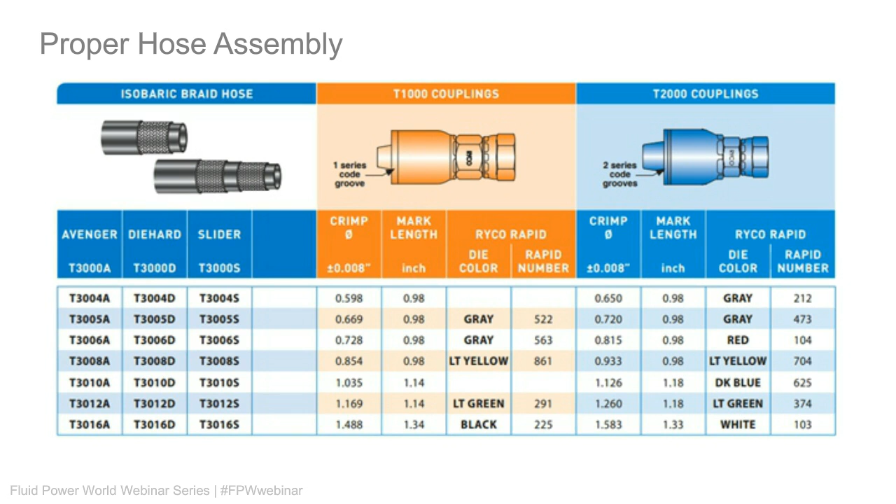So you could crimp it anywhere from 1.027 to 1.043, and the hose is still valid. But if you don't measure, you don't know where you're at, so you either risk over-crimping and restricting flow or damaging the braiding on the hose, or risk it not being crimped enough and blowing off a hose end. For the cost of a caliper—$10, $15, $20—there's no harm in buying one to make sure you're not responsible for a hose failure.

Josh, is it better to have a hose that's measured too short or too long? That's a good question. I would rather have a hose that is too long. A hose that is too short tends to put pressure on the connection between the hose and the fittings, which is usually the number one spot of failure in a hydraulic hose. There are also chances of a hose somewhere in the middle getting pinched or damaged physically.

Wear over time happens because between two places it can't move—the hose can move, but the fitting cannot, and that causes tension or compression and wear right at the connection. When you make hoses too tight, you create that tension and get premature hose failure. If a hose is too long, you risk it laying where it shouldn't or rubbing on things, which can cause quick failure if there's a lot of vibration. But it at least allows enough slack, and you could always use hose clamps on a hose that's too long. I'd go for a hose that's longer rather than shorter.

We've had a couple general questions about the lifespan of hoses. I realize that's hard to pin down, but Josh, could you speak about how the lifespan of hoses could be compromised when not following proper procedures? Exactly—everything we've talked about today allows for the most reliable hose, which lasts the longest. First, make the correct selection compatible to your fluid and ambient conditions. If you need a hose that's abrasion resistant, choose that, and once you choose the correct hose for your application, install and manufacture it correctly.